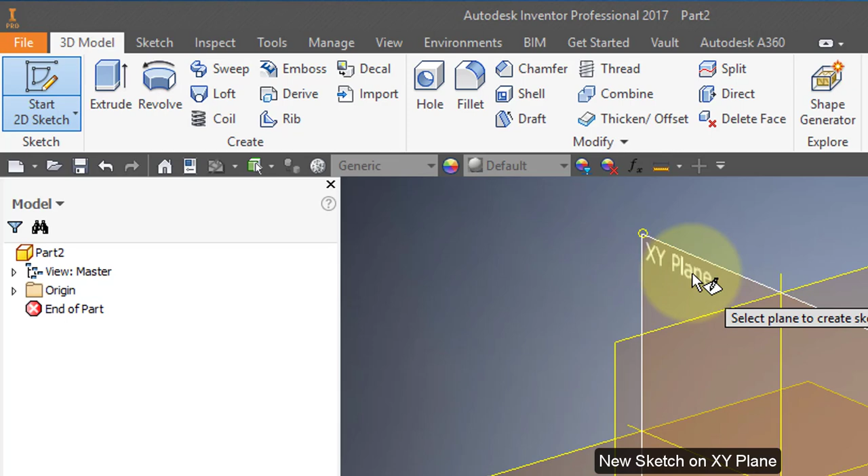I'm going to start by creating a new part and a new sketch on the XY plane. Choose your centered rectangle, select the origin, and enter 11, tab, 4, tab, enter.

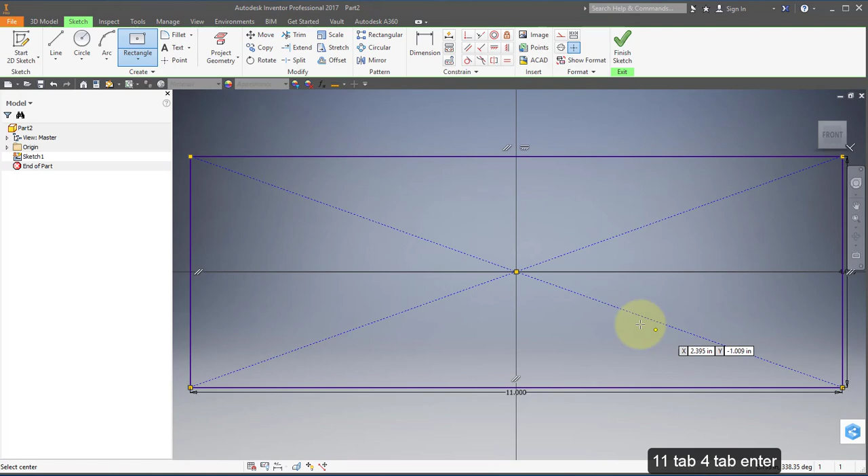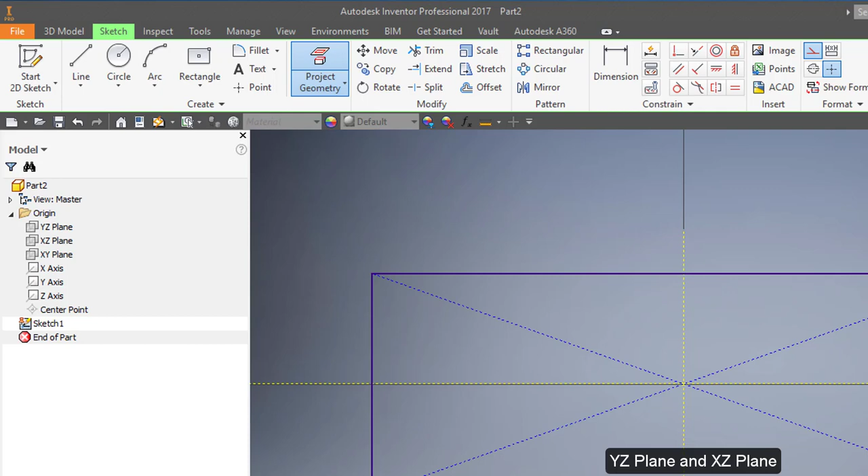I'm going to turn on construction geometry, select project, open up my origins folder, and project my YZ plane and my XZ plane. Then I'm going to turn off construction.

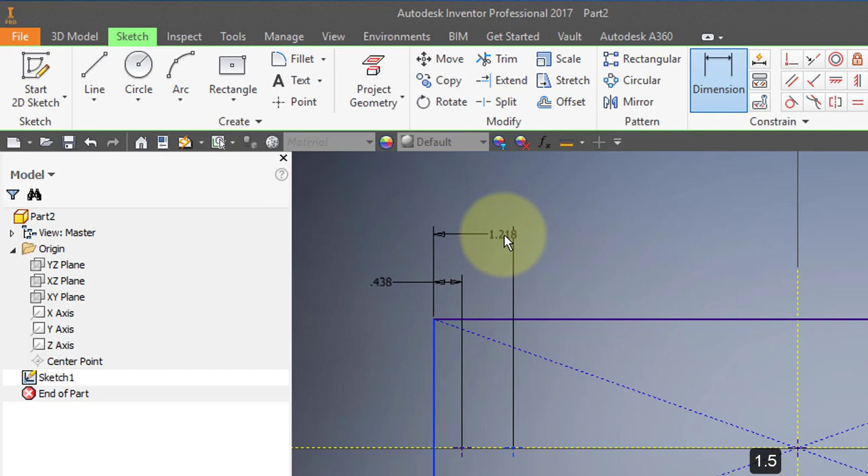I'm going to choose my point tool and place one approximately here, one here, and one at the origin. Select my dimension tool, dimension these points. Make this .438, and make this 1.5.

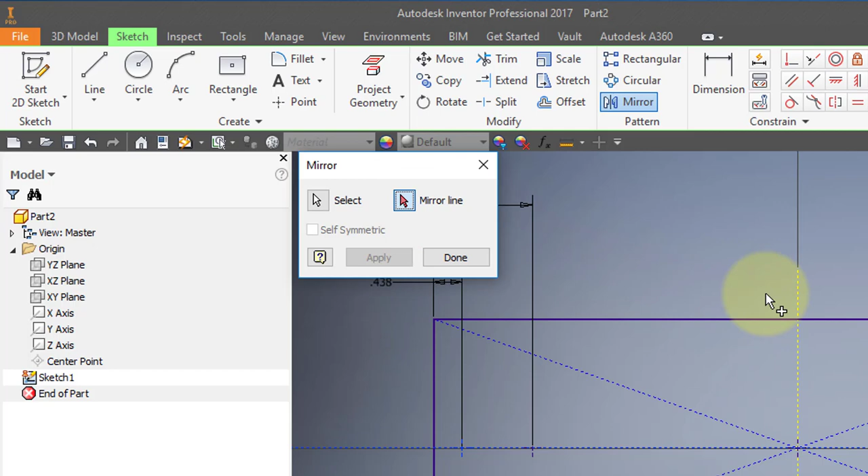I'm going to select my mirror tool and select this point. Select my mirror line, select this mirror plane, select apply and done. Finish your sketch.

Choose extrude. Set the distance to 1/2 inch, 0.5. Go in the reverse direction. I want to keep my sketch on the front and select OK.

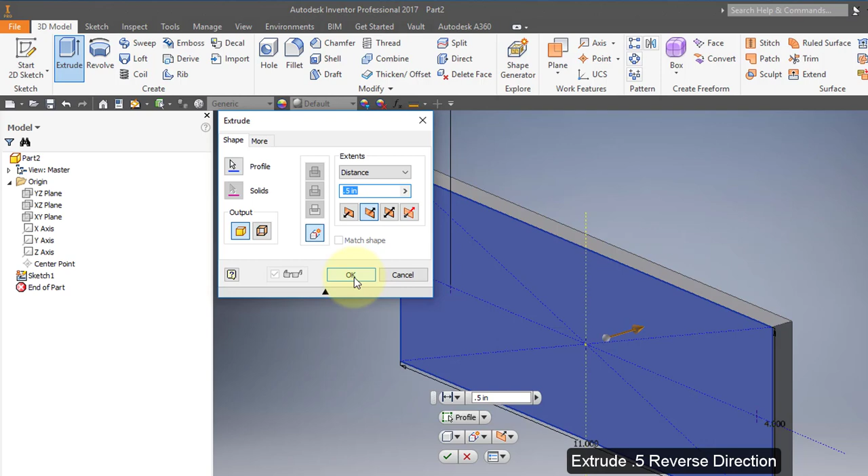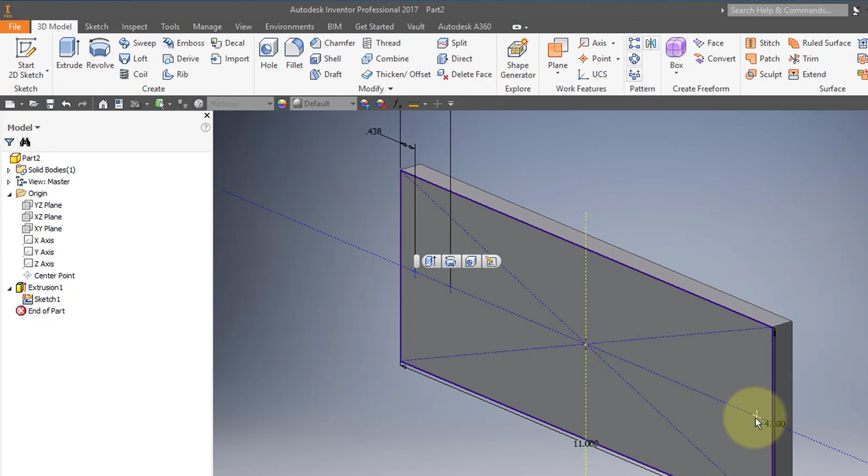Open up the folder for the extrusion you just created, find your sketch, right mouse button over it and turn on the visibility. Select this point, hold your shift key and select this point. Select your hole tool.

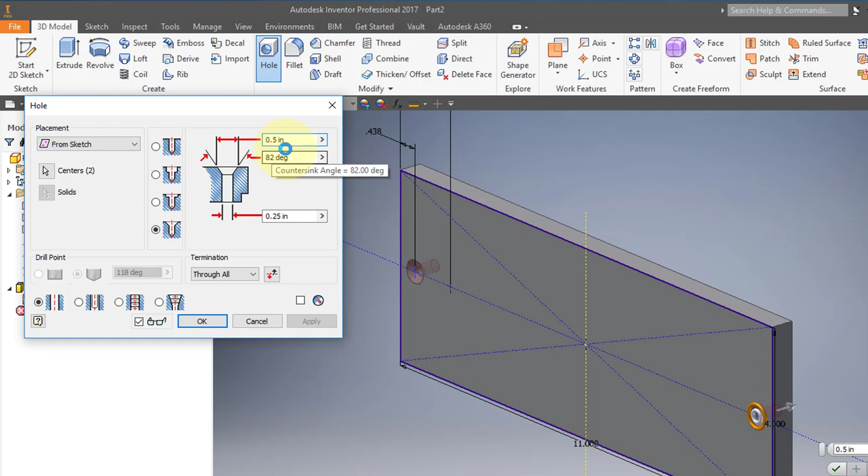Select countersunk. Set distance to through all. The diameter should be 1/4 inch, and the width of the countersink should be 1/2 inch, and the angle is 82 degrees. Select OK.

Select this point, hold the shift key down and select the point at the origin. Select your hole tool, set the diameter to 0.313, make it a through hole, no countersink, through all. Select OK.

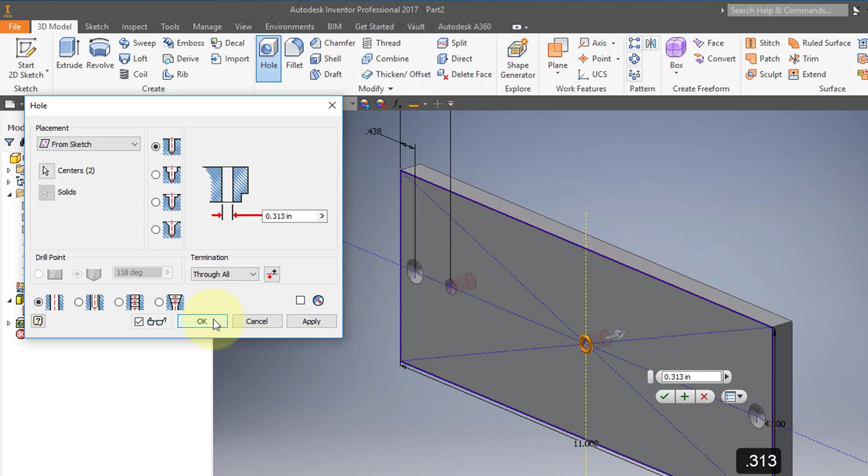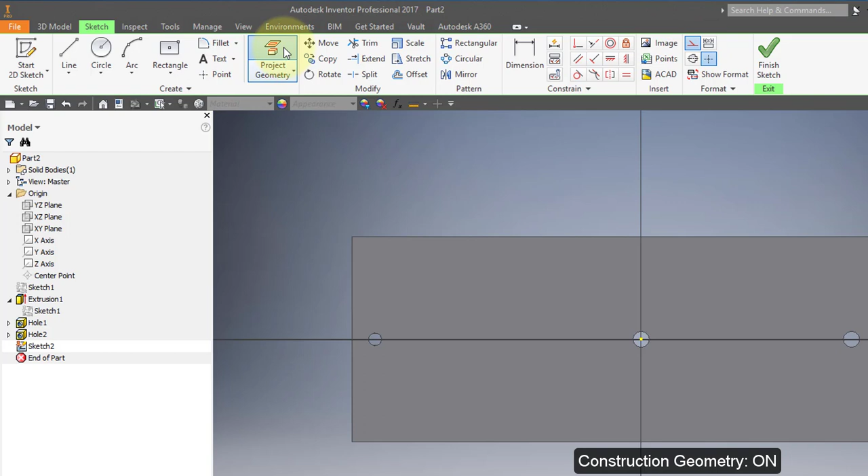Hover over the sketch you've been using, right mouse button, and turn off its visibility. Turn around to the back of the plate and create a new sketch on that surface. Turn on construction, project geometry, project that face, and project the YZ and the XZ planes.

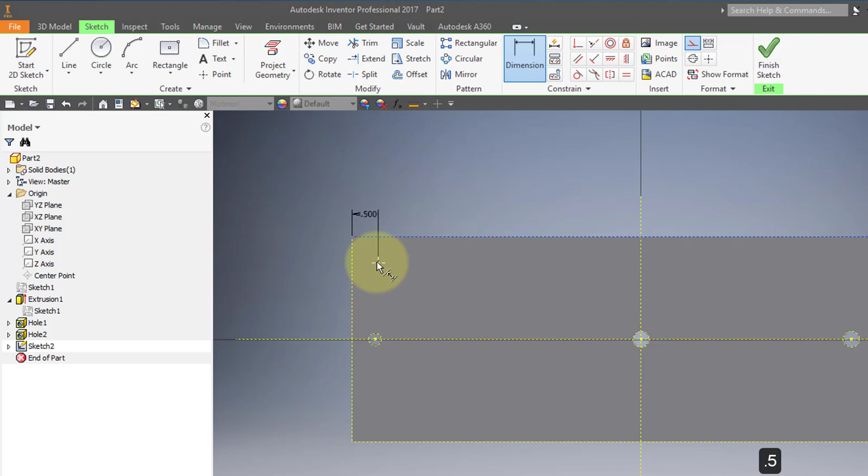Turn off construction, select point, place the point approximately here. Do not let it line up with this hole. Place it approximately out here. Choose dimension, and dimension from here to here, that's 0.5. And from this edge to the point is also 0.5.

Select your mirror tool and draw a window around the point. Select it, choose your mirror plane, this plane here, hit apply and done. Choose mirror again and choose this point, then shift and this point. Choose your mirror line, select this line, select apply and done.

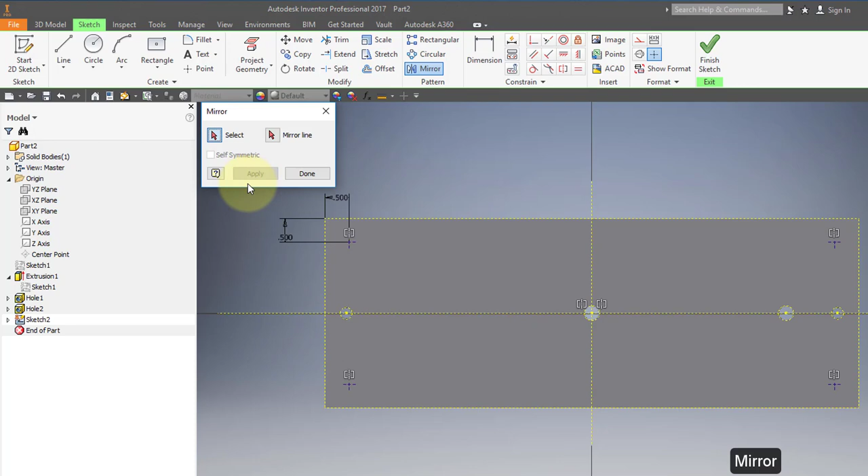Finish your sketch. Select your hole tool. This hole is threaded, it does not go through all, it goes to a distance.

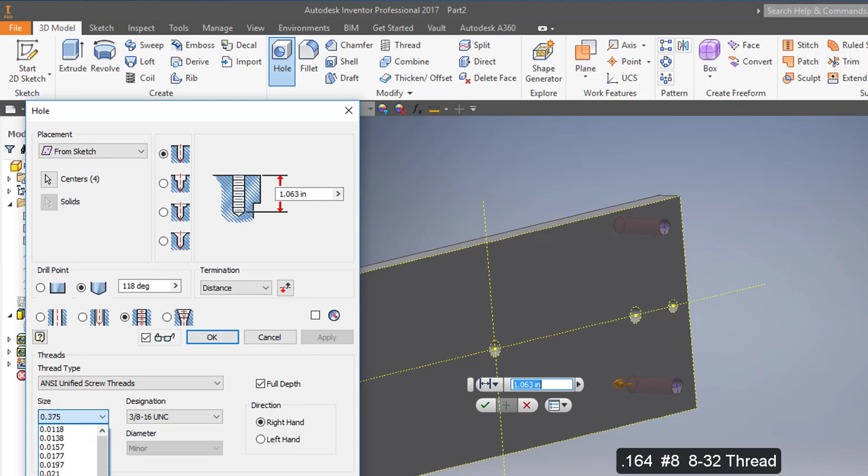The thread, scroll up to the top and find number 8, it's an 8-32. And the depth is 0.275. Select OK.

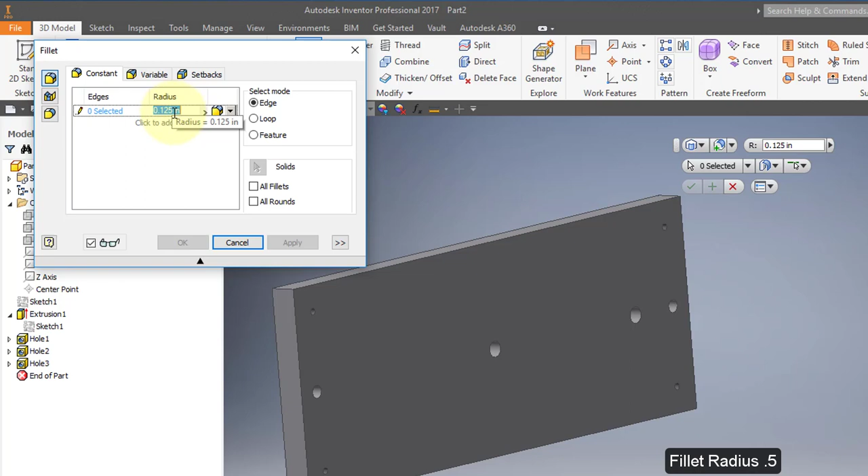Choose your fillet tool. Change the radius to 0.5. Select these 4 edges. Select OK.

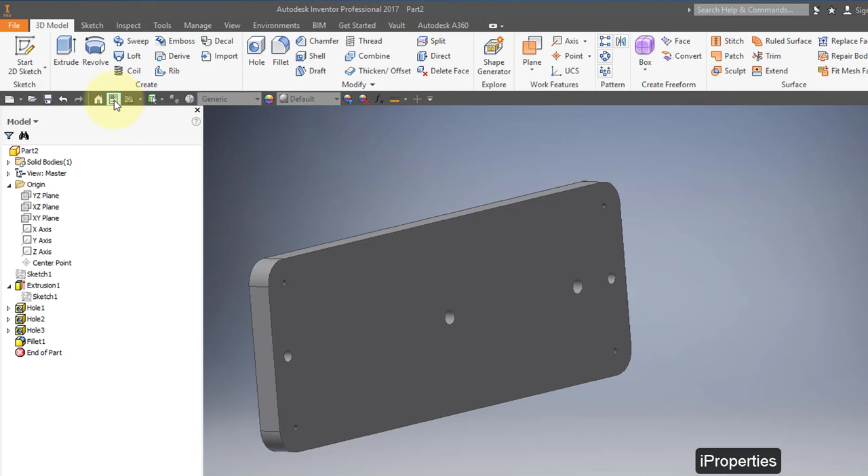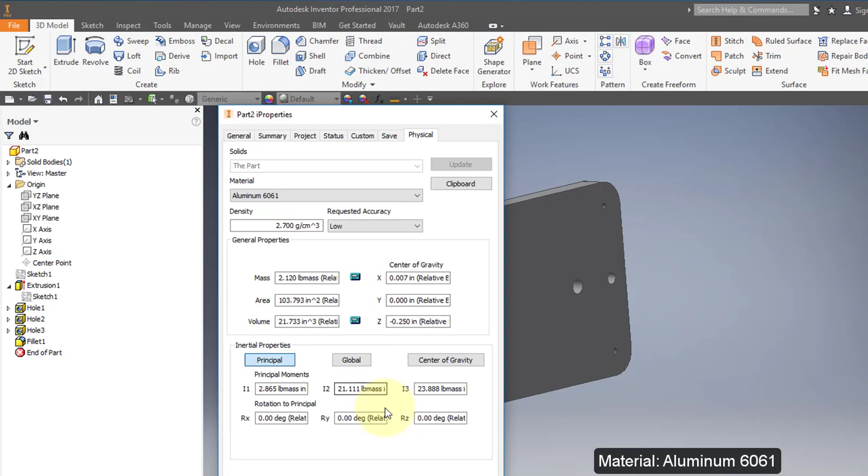Select your iProperties. Go to Summary and change the title to 16 base plate. Go to Physical and change the material to aluminum 6061. Select OK.

Save your part. Call it 16 base plate. Create a new drawing.

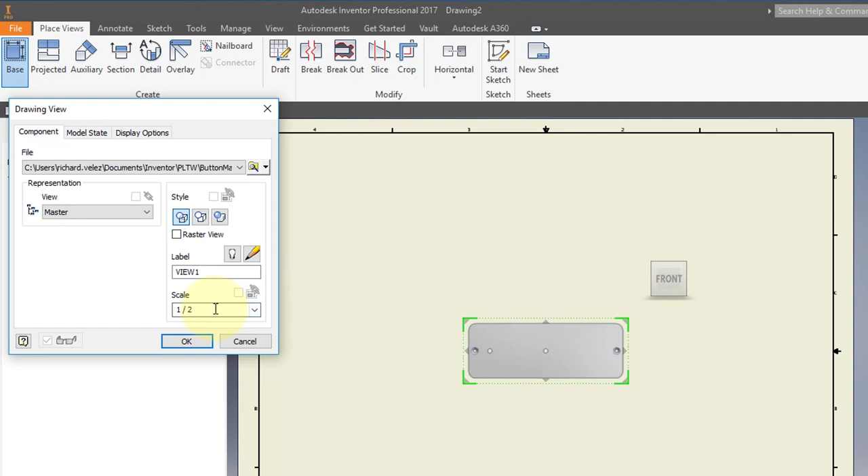Select your base view. Change the scale to 1:1. Place a side view, a top view, and an ISO view. Make sure hidden line is on, slightly shaded blue. Select OK.

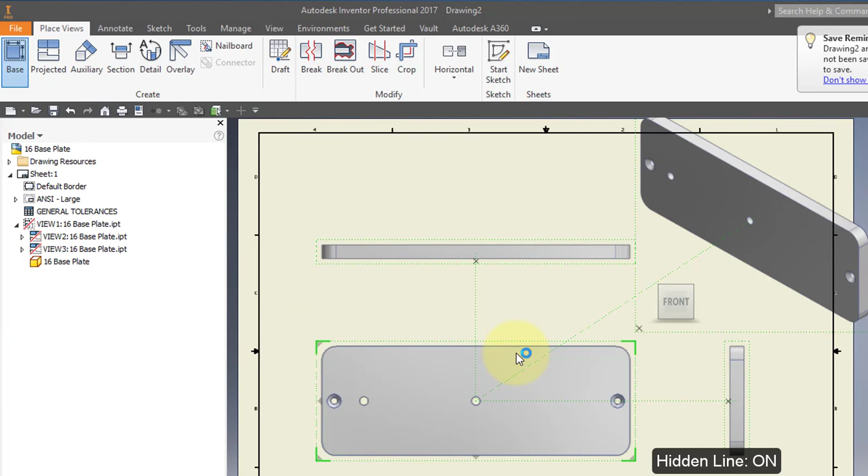Select your ISO view. Turn on shaded and change the scale to 0.75. Select OK.

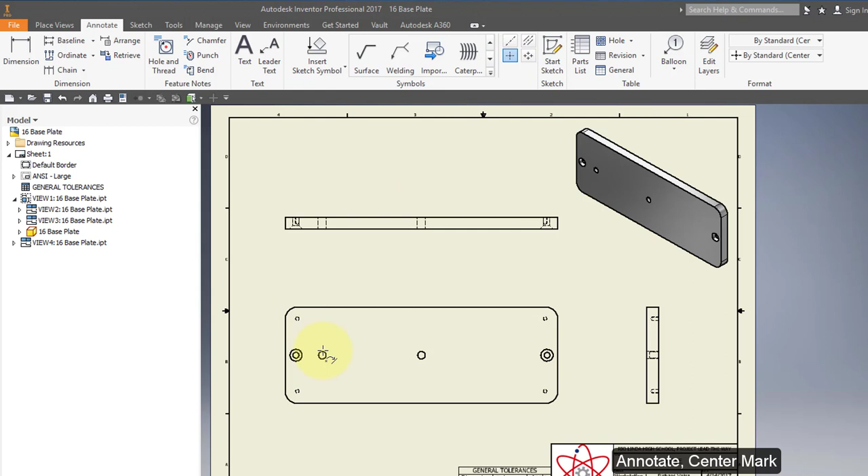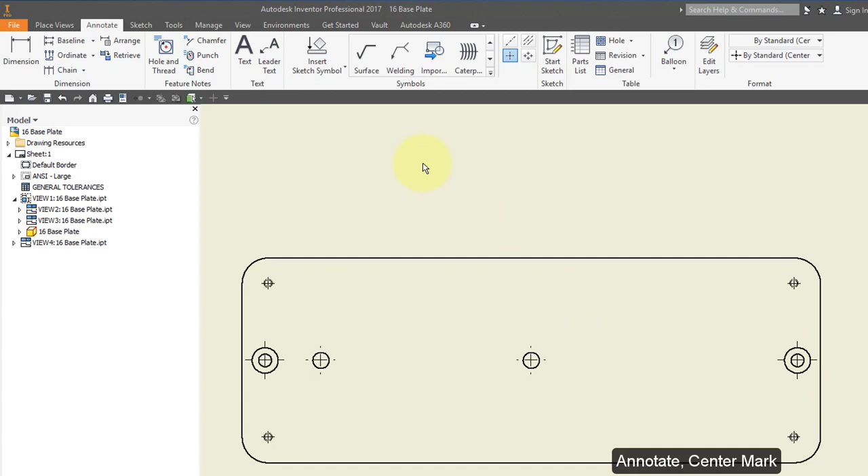Go to Annotate. Select your center mark tool. Select the outer circles. Select your centerline bisector. Point to the midpoints of these lines.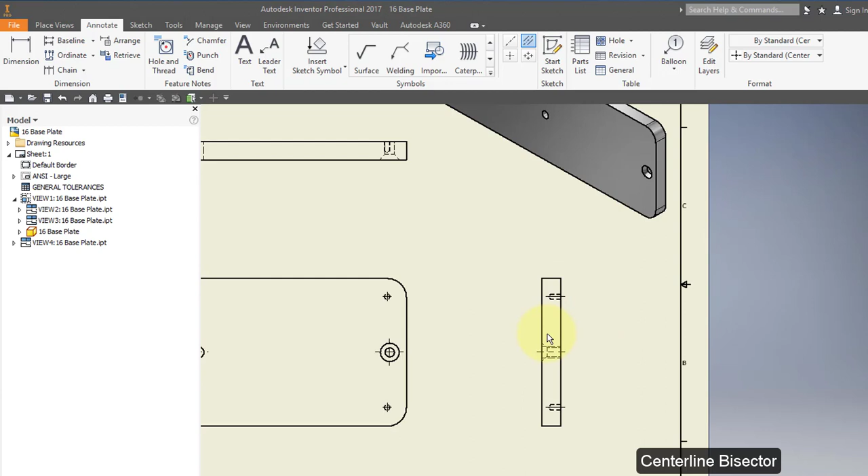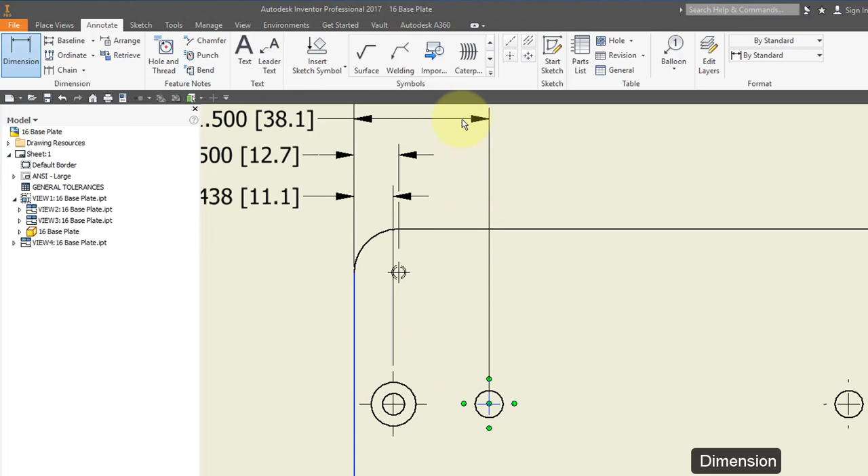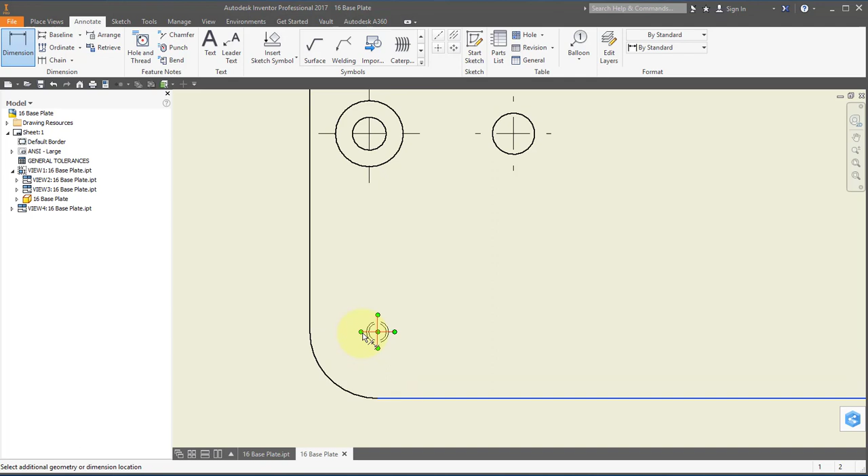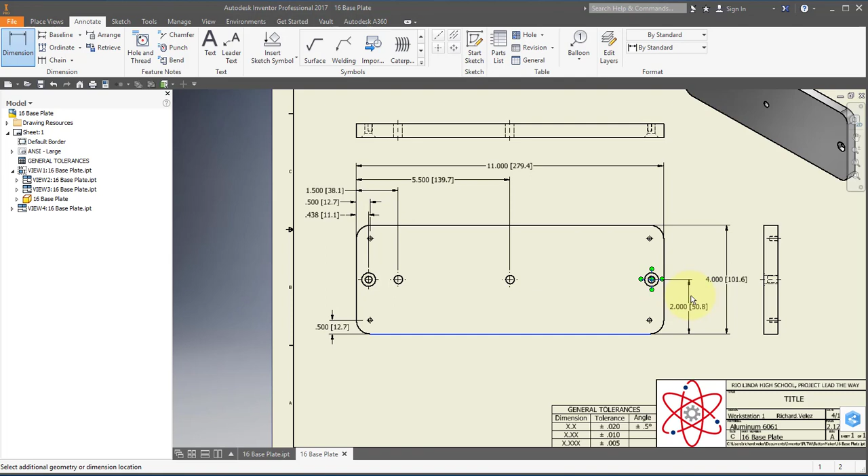Go to your dimension tool. Choose your hole and thread tool.

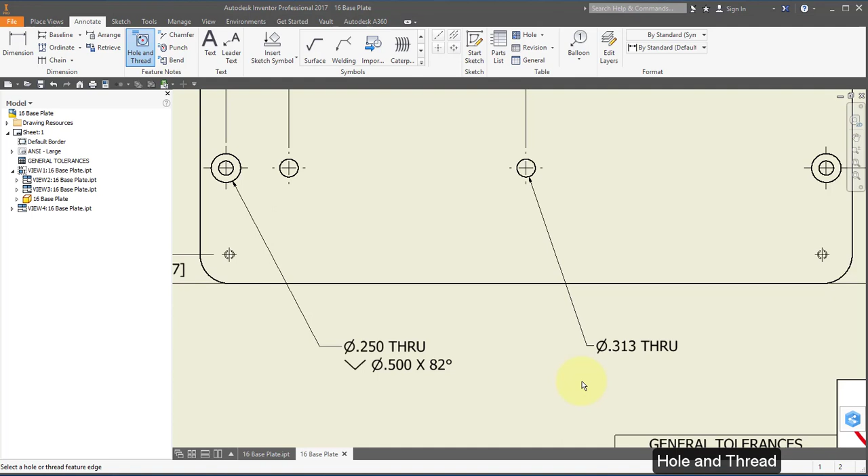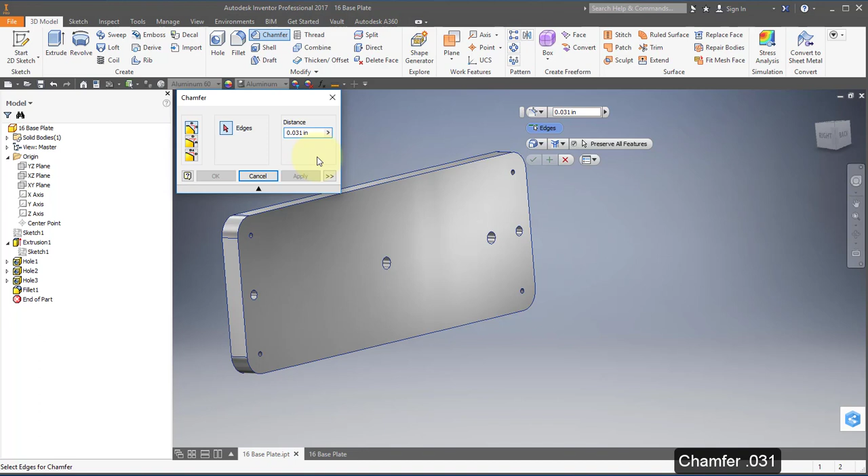Go back to your part, and I'm going to add chamfers. I didn't want to do it before the dimensioning command because the chamfers just make dimensioning difficult. But choose your chamfer tool, and the chamfer is 0.031. Select these two edges. Select OK, and save your part.

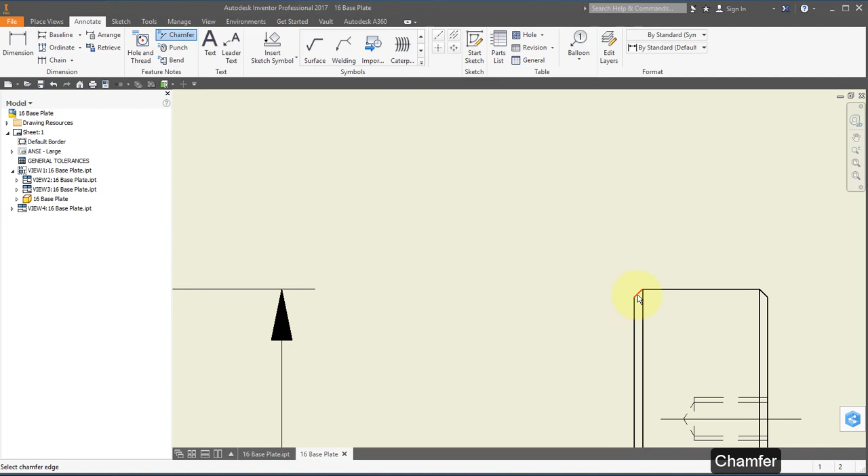Choose your chamfer tool. Select this edge and then this edge. Select dimension and dimension the thickness of the plate. Right mouse button, cancel.

Select this dimension and position my cursor at the front of the line, type in 4 capital X space to designate that this dimension occurs 4 times on the drawing. Select this dimension and do the same, position your cursor at the front and type in 2 capital X space. Select OK.

Select this dimension. This occurs 4 times. This occurs 2 times. This occurs 2 times. This radius occurs 4 times.

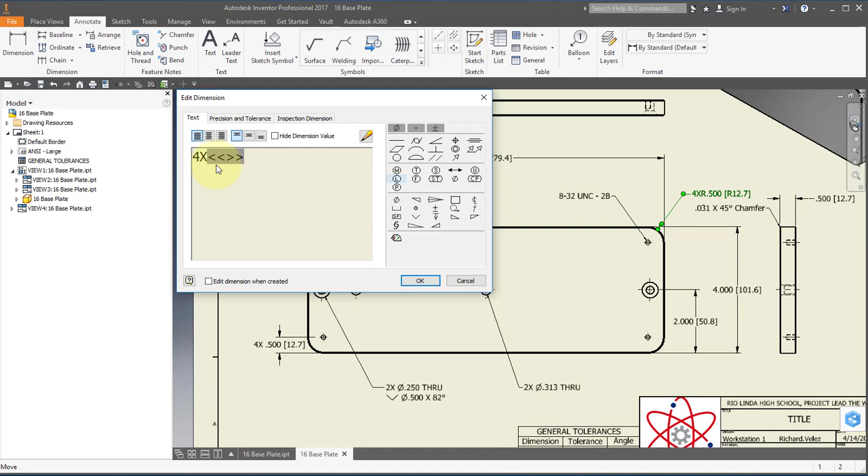Let's select the chamfer note, and at the end, type in space, TYP for typical.

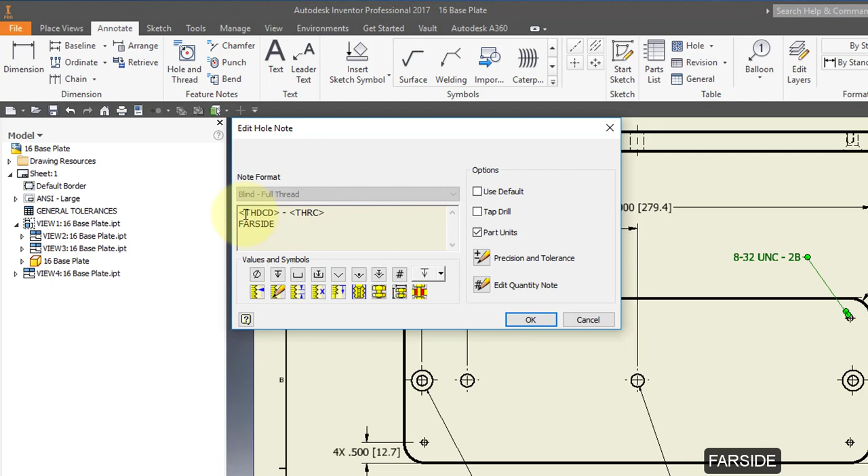Select this hole dimension. This hole occurs on the far side, so we're going to enter space, far side. Matter of fact, put it on a second line, hit carriage return. And this hole also occurs 4 times, 4 capital X space.

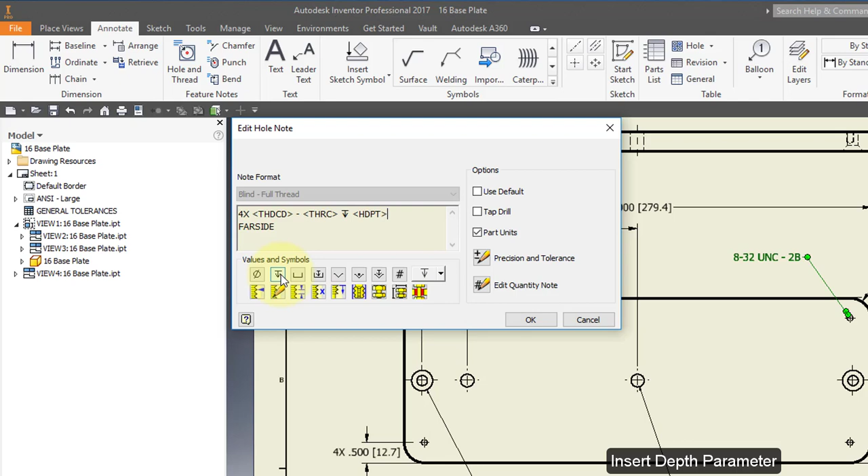Also, because it's on the far side, the depth did not show, so we're going to select insert the depth symbol, that is this symbol here. And then we're going to insert the depth parameter, select it here, and select OK. Your note should look like this.

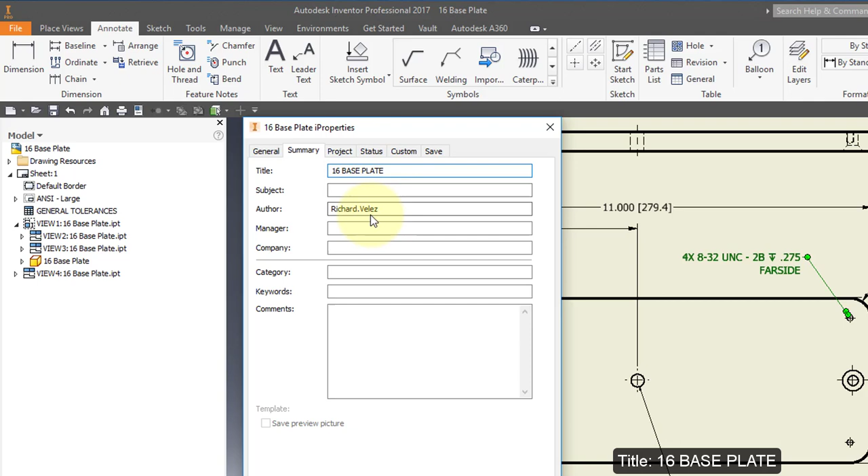Go to iProperties and Summary and change the title. Change the title to 16 base plate. Change the author to your name.

Before we leave this project, there's one thing I forgot to do. Go back to your part and go back to your iProperties here. Go to Project and change the part number from 16 base plate, change it to 16, and change the description to base plate, and select OK.

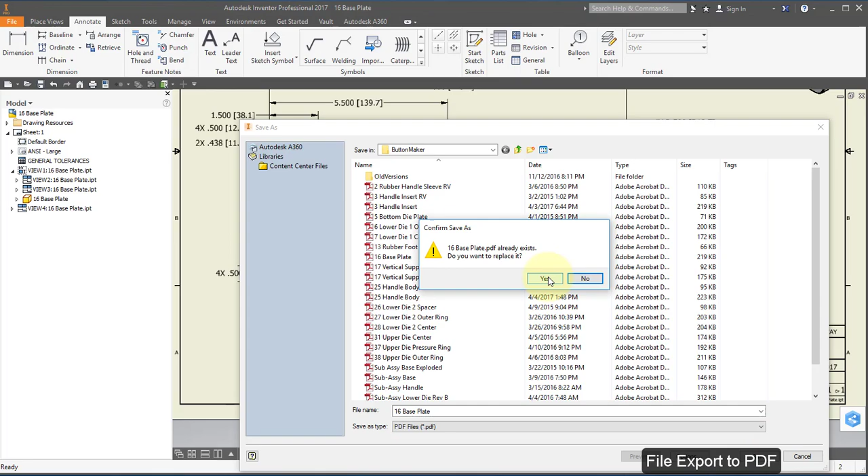Go to your drawing. The part number should be here, item 16. Save your drawing. Go to File, Export to PDF, save it in your Documents folder, and submit your PDF drawing to Project Lead the Way to complete your assignment.